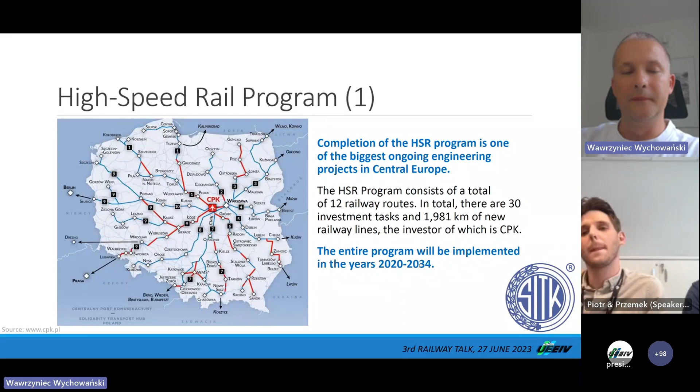In Poland, we are still thinking about the core of this network, and this core is called the letter Y because of the shape of this network. It is the railway line which connects the major cities: Łódź, Warsaw, which is the capital, Poznań, and Wrocław.

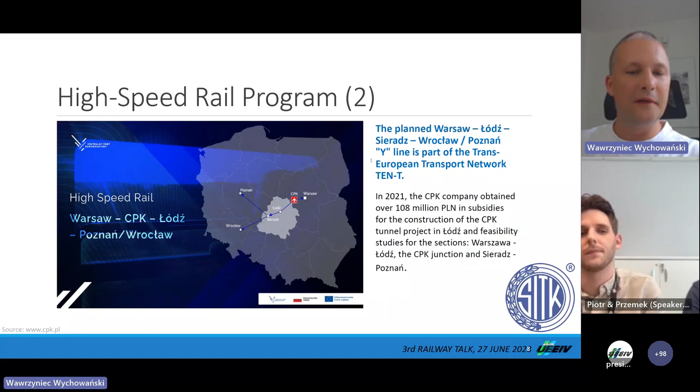What is important here is that we've been talking about this program for years - 15 years or more. But today we start a real process of design. You will see in the next slides that this program is currently ongoing, and you will realize that we are in the design phase, but very close to the execution works.

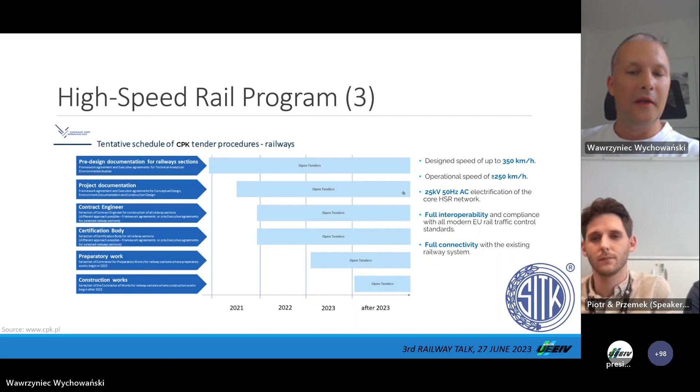Here you can find some dates - let's call it the typical approach. There is pre-design documentation for these sections, project documentation, contract engineer certification works to prepare the construction works, and the construction works at the end. You cannot see here all the topics related to this, like the test and commissioning programs and so on. But this is just to present that at the end of 2023, most of these lines will be at this level of construction works.

When we are thinking about high speed in Poland, we have to see that this is a very optimistic program. Design speed is up to 350, same story as in Italy. Operational speed is 250. Of course, when thinking about the new network, we have to consider the new type of power supply, which is double 25 kV alternating current.

This is a typical solution - full connectivity with the existing railway system. This is something unique because in many countries, the high-speed network is totally separated. In Poland, we would like to be connected to the existing traditional railway.

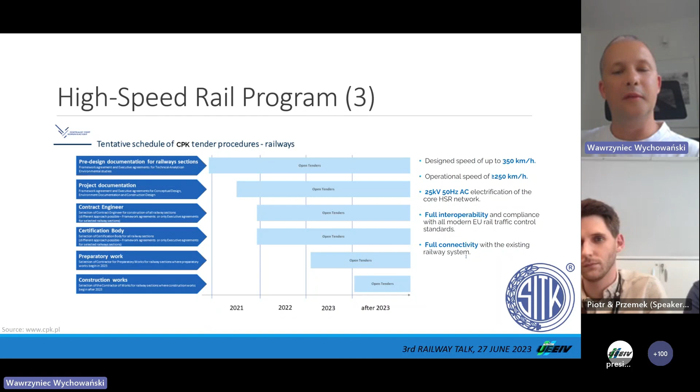This program is divided into phases - there is a study phase, a design phase, and others. What is important here is the new approach at the Polish market, which is the framework. We would like to define the short list of companies responsible for the specific phases of this program.

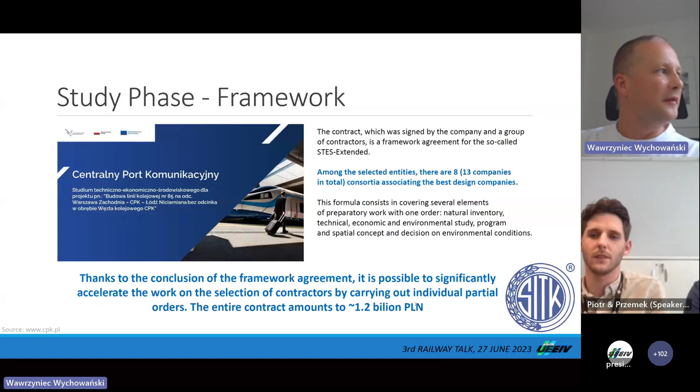Here you can see some kind of summary for the study phase - there are 13 companies. This is the amount of money behind this program: 1.2 billion zlotys. At the end of this presentation, I will try to do a short conversion between zlotys and euros, but I think when you divide it by 5, you can see the scale of the program.

Next phase is the design phase, and this is something we are already in. Again, there are another 11 companies from countries like Poland, of course, Spain, France, Germany, and Korea - a lot of entities with huge experience in high-speed railway across Europe and outside Europe. The budget behind this program is 7 billion zlotys - again, divide by 5 to see the amount in euros.

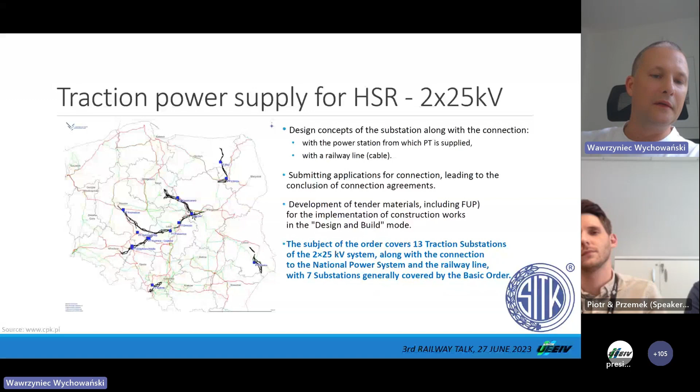Traction power supply - something new here again, we have double 25 kV. This is a similar story like in Italy. The existing system at the conventional lines is 3 kV DC. Within this project, we have to design 13 new traction power substations, which will be ready to supply the high-speed trains traveling across this new network in Poland.

If you are thinking about high-speed railway, you have to define the input - you have to define the standards. Instytut Kolejnictwa developed these standards, and there is version 2.0 in force. You can find a lot of technical details describing our approach to high-speed railway in Poland. Of course, these standards are still under revision, and they are discussed with French entities, Spanish entities - companies or entities with experience in high-speed railway.

In Poland, we do not have rolling stock ready to be used at high-speed railway. That's why there is a shortlist of 10 companies like Alstom, like Hitachi, the biggest ones, with minor representation of local Polish companies, to be ready and prepared for the moment when the network will be ready to be put into operation. Then we will have the new type of trains ready to be operated at the speed of 250 and even above.

This program in Poland is connected to Europe, let's say. We have to consider that we are somehow in the middle, and we have to be connected. There is a project of the Baltic states, which is Rail Baltica. Probably most of you heard about this project because it's a little bit more advanced than the things we are doing in Poland. And we are connected - we are connected to Rail Baltica.

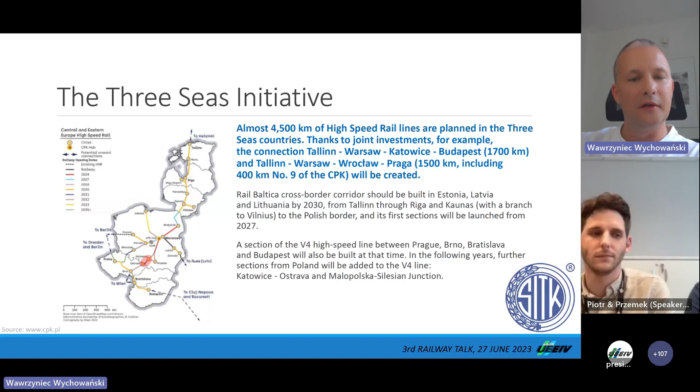And the 3 Seas Initiative - this is probably new for most of you, but here we are trying to connect to neighbor countries like Czech Republic, Slovakia, the Baltic states, and Ukraine. The program ongoing in Poland is connected to all of these neighbors. We would like a straight connection to Berlin, to travel fast to Vienna, and it's considered to put a regular track to Lviv and further to Kiev. All of these stories are connected and in line with the program we are facing in Poland.

So the first question we have to ask is: why? Why do we even bother investigating anomalies in the railways? This question can be crucial, and there can be numerous reasons why we should focus on detecting anomalies. But above all of them, nothing is more crucial than safety. It should be a top priority for everyone involved, whether a company, a passenger, or a member of the public - ensuring safety is of utmost importance in the railway industry.

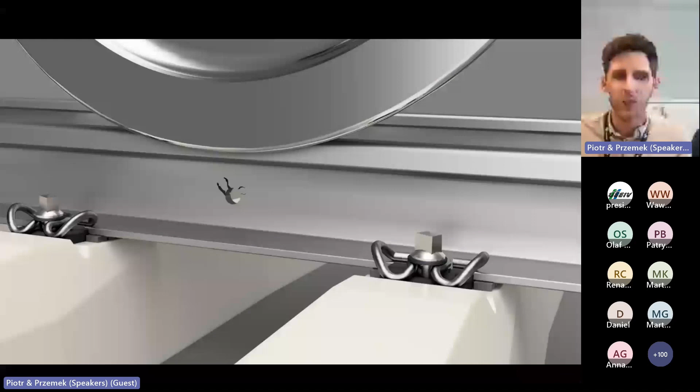When it comes to anomalies, what does this term actually encompass? Let's name three groups of railway infrastructure elements that are susceptible to anomalies, such as rails, ballast, and fasteners. If we focus on just rails, we can differentiate at least four types of anomalies: fracture, cracks, bend, and head checks. In some cases a part of the fastening can be missing, just like here - the part of a clip is missing. Or in this case we can witness a bolt hole cracking, a situation which also frequently happens.

There are already many anomaly detection methods, starting from visual inspection, ultrasonic testing, acoustic monitoring, infrared thermography, track geometry measurement, and ground penetrating radar. We focused on developing solutions based on vibration-based methods.

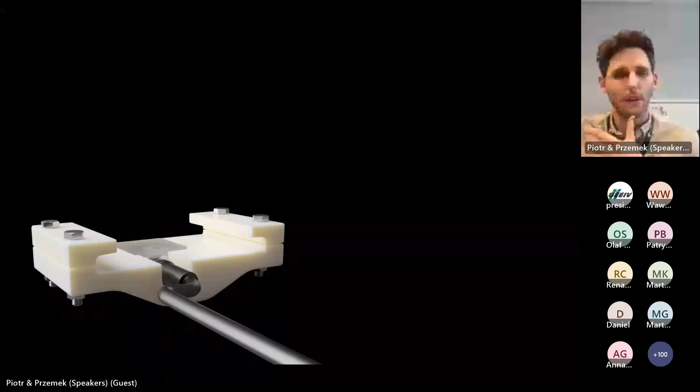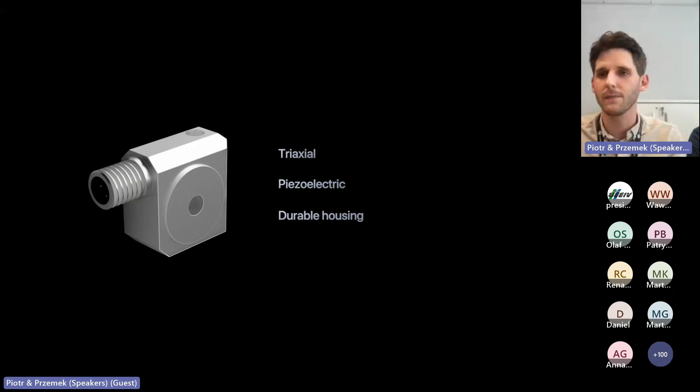Here is a little sneak peek of how it looks - here it is assembled, here it is disassembled. When it comes to how it's made, it consists of an electrical insulator, accelerometer, and polymer housing. The accelerometer we use in our solution is a special triaxial piezoelectric accelerometer with a military-grade durable housing. To quickly and rapidly analyze millions of samples we receive, we use a specialized DSP processor, which stands for Digital Signal Processor. It helps with noise filtering and provides efficient calculations with high-speed processing.

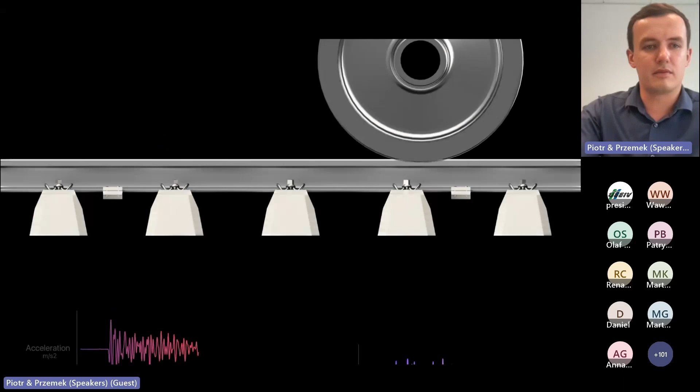But to tell you more about how this works, here is Piotr. In macro scale, the system consists of two accelerometers attached to the bottom of the rail. When the train is coming, both sensors feel the vibrations and it generates a voltage signal through the piezoelectric effect.

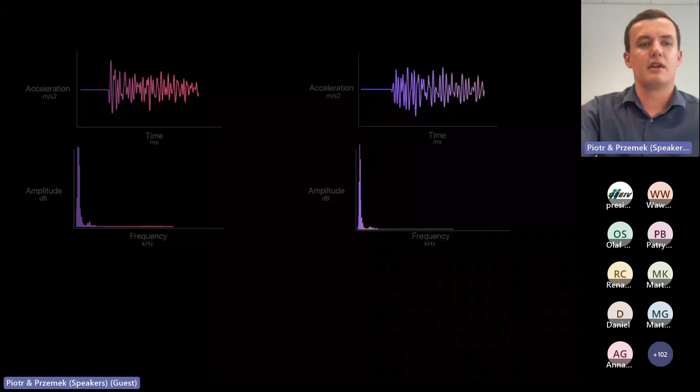At first, we have to filter the data. In our case, the best filter family was the recursive filters, like, for example, Kalman filter. Next, we have to perform Fourier analysis to get the dominant frequencies. The Fourier transform has the nice advantage that it's not sensitive to some random noises.

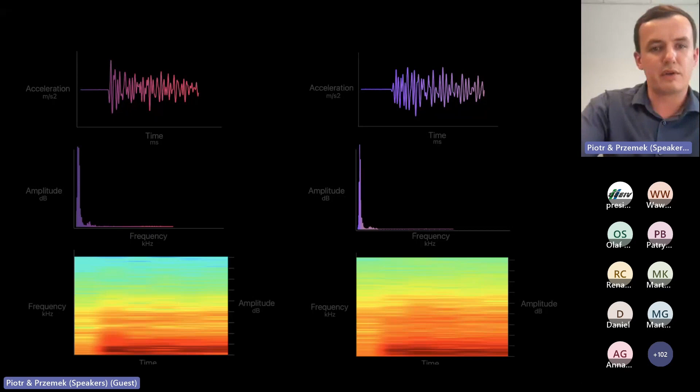However, the frequency may change in time, so we have to make spectrograms too. As you can see, even now, without anomalies, the signals differ from each other. But how can we find the anomalies by human eye? We can find some different frequencies, some peaks, something is changed.

But if we have millions or even billions of samples, the human is not able to analyze that. Moreover, if you have some pattern of signal that represents some physical phenomena, we are not really sure if this is what we think. We have to do a lot of measurements and it takes a lot of time.

But we hope that we found some solution. To know more about that, let's go back to Przemek.

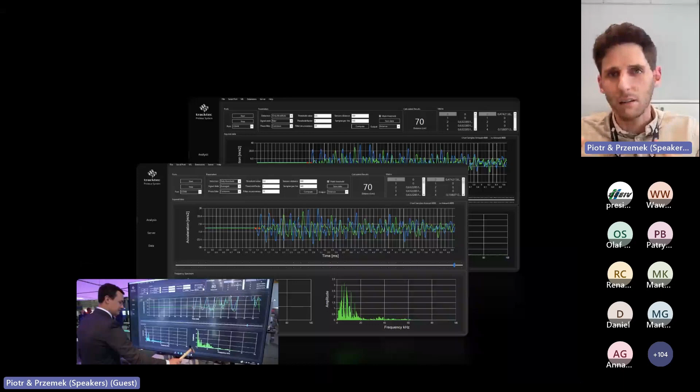And thanks to that, and thanks to a lot of calculations in hidden layers, we were receiving information. It is possible to receive information about the position of anomalies in the rail. Last year, we were able to show a live demo of the system during the Berlin InnoTrans Fair.

During the last few years, we were able to install electrical sensors on hydraulic drives on one of our high-speed turnouts. This one is in Psarski. Together with live weather information, we are analyzing voltages and currents of hydraulic drives and remotely spotting warning behavior of it.

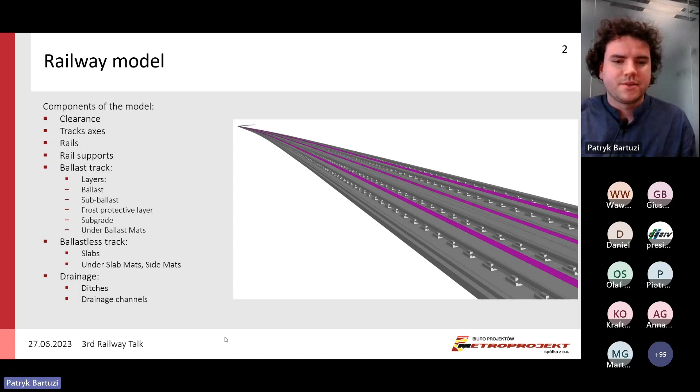Kuba, I would like to ask you, take the microphone a little bit higher, because of the quality of the voice. Okay, now it's super.

Thank you. Okay, all 2D documentation is made from 3D models. This keeps the documentation consistent and eliminates the risk of differences between all the documents.

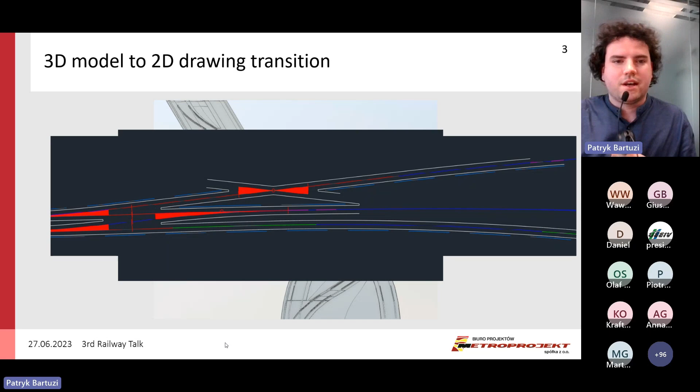You can see on the slide a 3D model of slab track, and from the model we can make 2D documentation of different types. For example, we can make the plan which includes slabs, and we can make a different 2D drawing with track axis, with turnouts, and the documentation is consistent, which is most important in situations like changes in the project or design. You don't have to change every drawing one by one. If you make the change in the 3D model, the changes are automatically transformed into the 2D drawings.

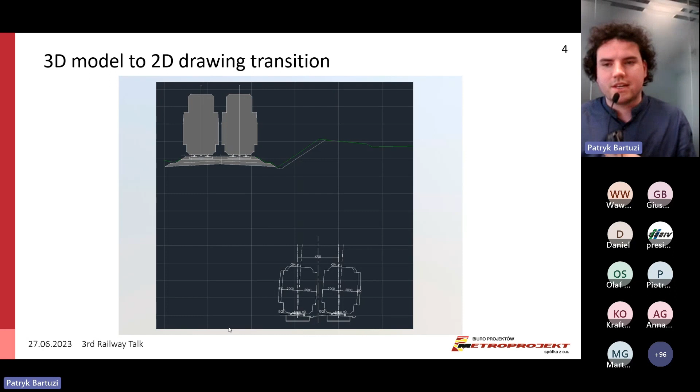Of course, there are other types of 2D drawings, like in this slide, cross sections. Cross sections can be made at almost every kilometer using different styles as shown in this example, and dimensions, which you can see in the lower part of the graphic, are generated automatically, which allows us designers to check if there are no mistakes.

Another very important thing in using BIM methodology and BIM models in design are calculations. The most important calculations in the railway branch are earthwork balance. As many of you probably know, the earthwork balance may generate many millions or even billions of dollars or euros of cost in the building process. So it is very important to make the earthwork balance as precise as possible.

Manually, there is a possibility to calculate this balance using the cross-section method, which is based on approximations that may generate inaccuracies or even mistakes. We can use 3D models to generate earthwork balance directly from the model, based on the difference between surfaces generated from the existing terrain and from the lower surfaces of various layers, including the lower layers of railway track and drainage.

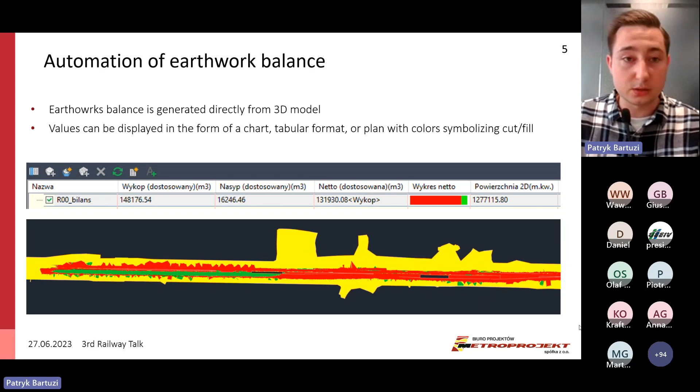Hello, I'm Jakub Schulz, and like my friend said earlier, I'll cover the part about construction. We're sorry about this inconvenience with our microphone, but our main device appeared to not work before the start. But as part of our work, we're engineers, so we had to find a solution.

Building information modeling, BIM, is well known in architecture and structural design, but when we talk about construction in railway, it's still kind of an innovation in Poland. But implementing BIM technology makes our job easier, especially when we talk about coordination between all branches. Work done in a railway model by my colleagues is the starting point for me.

But we can work in many different ways. Modeling can be done manually, and even then using 3D models from all branches is really time saving. But parameterization is the thing that optimizes the task on an unimaginable level. Track axes, in the form of 3D polylines, are the paths which we encapsulate with construction.

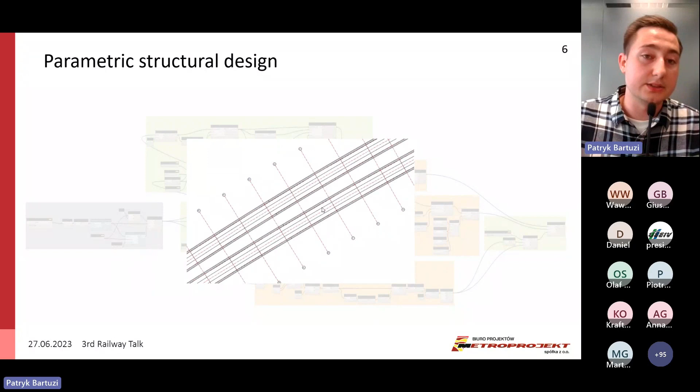It is very important too that Dynamo scripts are mostly done with visual programming. Knowledge of any programming language on an entry level isn't needed, and only more complicated scripts are made with custom nodes written in Python. So, like I said, we just encapsulate the track axis with construction, and that's how we build our model.

When we talk about the construction model, the level of detail and information of course depends on every project, on what we need to do. With TBM tunnels, modeling can be done almost fully automated, like I said. We encapsulate the railway model with construction around it. And with Dynamo scripts, it's possible to automatically divide the tunnel into tube segments and model every layer of construction.

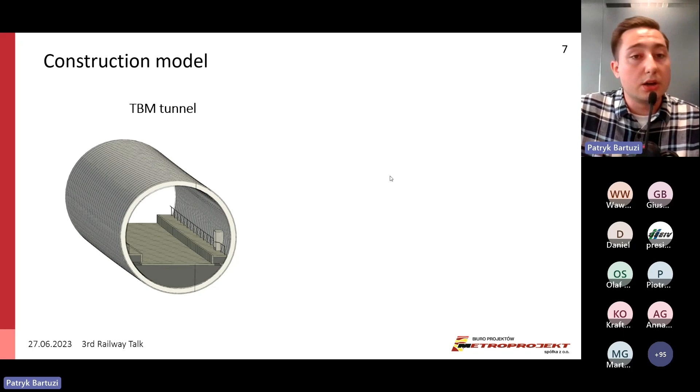But we don't design only TBM tunnels, we also design cut and cover tunnels. In both types of tunnels, we include every structural element like floors, beams, or walls. And everything practically depends on the required LOD and LOI levels.

LOD is level of detail and LOI is level of information. These models are then exported to create analytical models in structural analysis software, and with the use of the finite element method, we calculate the structure. But not only primary elements of the structure are modeled, we also create elements like lean concrete or jet grouting injections, which is really helpful at further stages of design, and I'll talk more about it soon.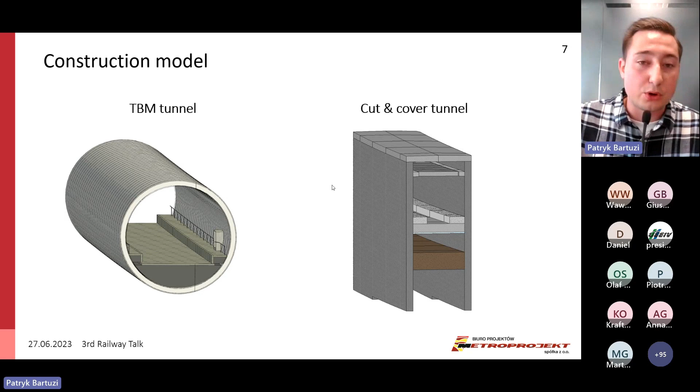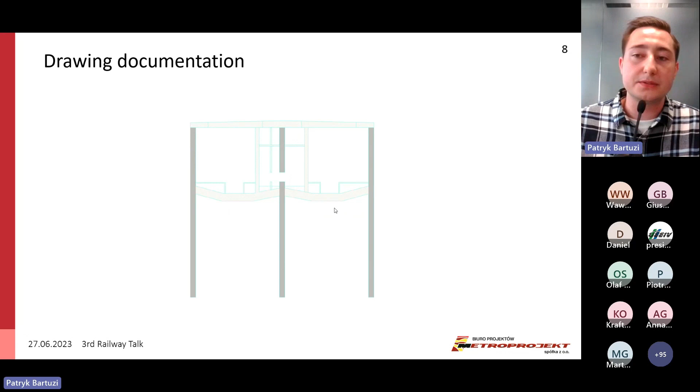When we talk about drawing documentation, like Kuba said before, just like in the railway branch, the 3D model is used to prepare all drawings. For over 70 years, our company has focused on a very high standard of documentation. But there is a very popular opinion that it is very, very hard or even impossible to reach the level of detail of 2D sketches in Revit. But to be honest, it isn't true when we've got really, really good standards and templates.

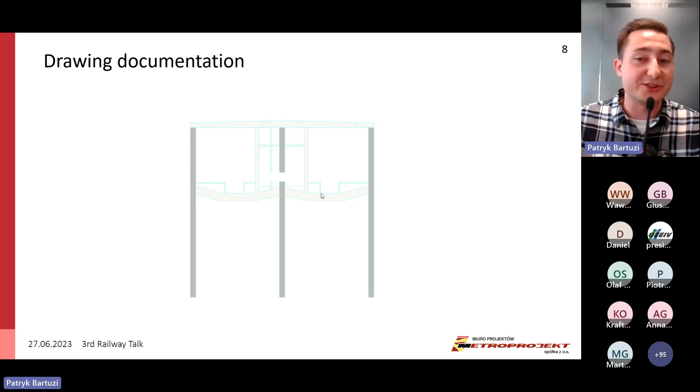Of course, we start with plans, like we can see here. These plans, sections, and every other type of view needed are generated in the model. And then with annotation Revit families and every other tool needed to recreate what was made in 2D before, we transform these views to create fully prepared project documentation that is ready to export and deliver straight to the investor.

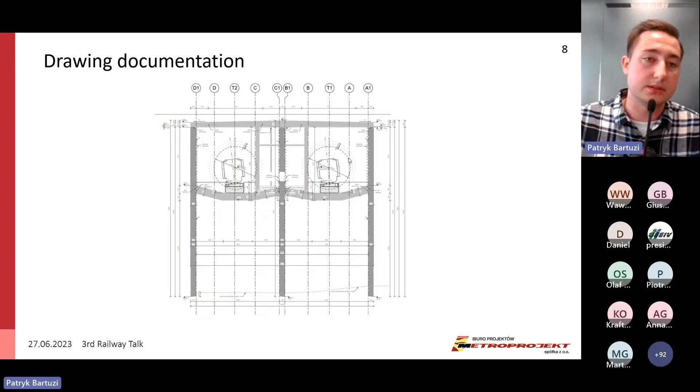But like I said before, BIM isn't only about the 3D model. It is probably the most important thing, but it's the methodology and workflow of digitalization at every stage of the project. Even in the model, parameters are as important as geometry. We can check every measurement and property of any element in real time.

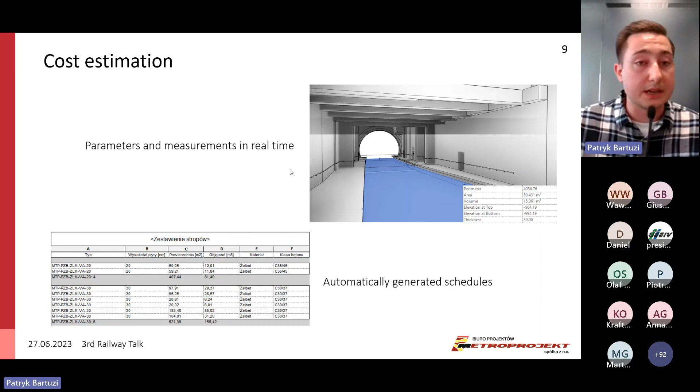At the final stage of the design process, we can use all these parameters for automatically generated schedules, then use them in cost estimation, reducing the amount of work needed. The model can also be linked with a time schedule to create video visualization of the realization process, and even used on site to inspect execution time.

And there are many other ways to use it, like model walkthrough in video form, or even with the use of virtual reality. Design process is just the beginning, and models are then used during operation and maintenance. Thank you very much.

Super, Kuba. I was waiting for this moment, for you to present the real usage of these tools. Because we save a lot of time and money when you drop in the automated process, for example, in the cost estimation of line infrastructure. Patryk, now it's your turn, and we'll focus on the signaling story, right?

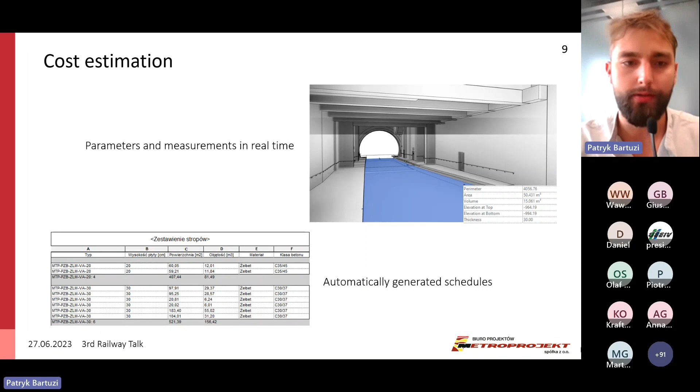Okay, hello everybody, I'm Patryk Bartuzi, assistant CCS designer, and I'm going to tell you some interesting things, I hope, about designing CCS systems in BIM technology.

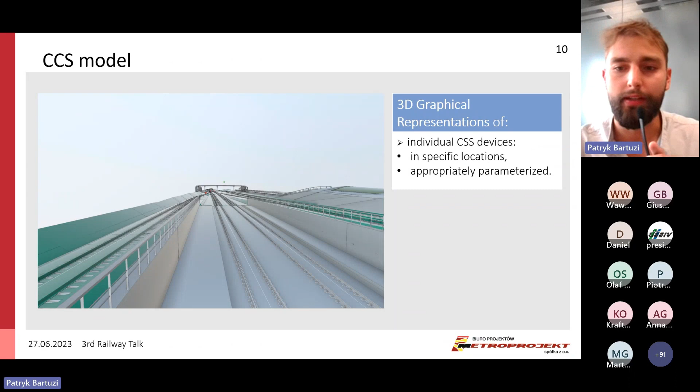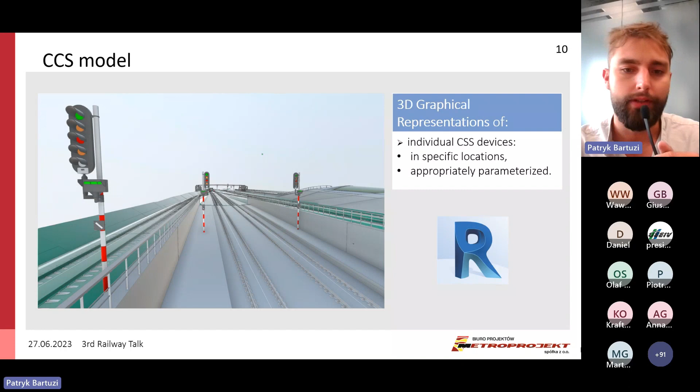In general, creating a 3D BIM model for the CCS industry is based on placing 3D graphical representations of individual CCS devices, which are appropriately parameterized and placed in specific locations. The 3D graphical representation of any CCS device is a family created in Revit software. My presentation is centered on the rail signal, which is the most elaborate and complex CCS device.

Polish rail signals can vary from each other in terms of the number of light chambers, light colors, position of the signal head relative to the mast, the presence and quantity of light stripes, quantity of individual indicators, and also the height of the signal head, which depends on the number of indicators and light stripes. So rail signals can exist in multiple configurations, and modeling each one individually could be very time consuming and labor intensive.

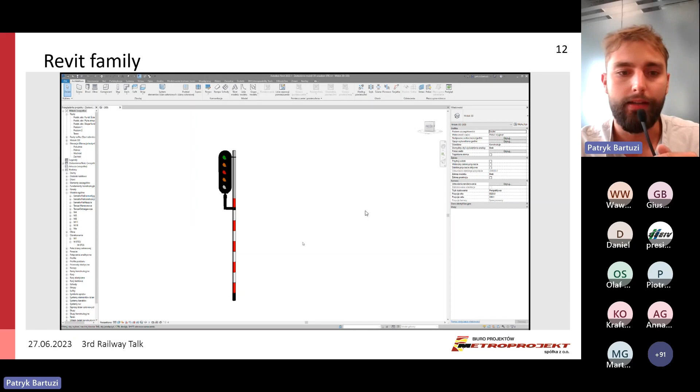So here is Revit. Revit software, in addition to creating just a solid with a specific shape, also allows us to assign parameters to that solid, and by setting values of those parameters, we can control the shape. As a result, we obtain one family representing a rail signal, which can be repeatedly placed throughout the project space. For each individual instance of that signal family, we can assign specific parameter values to get the required design scenario.

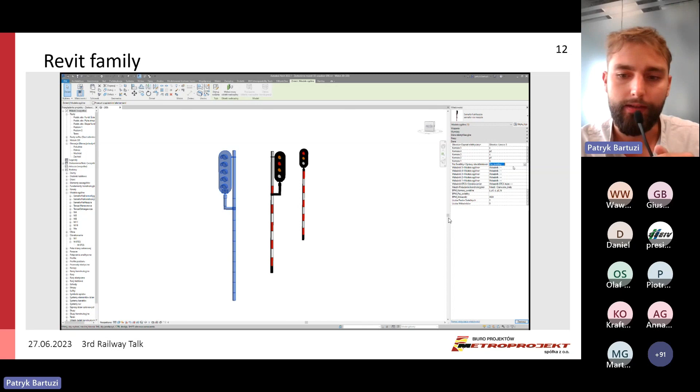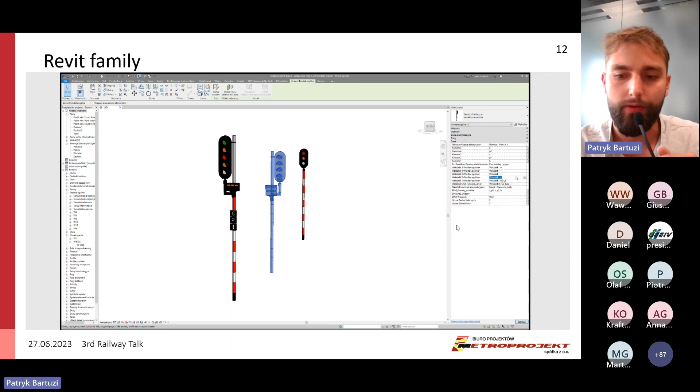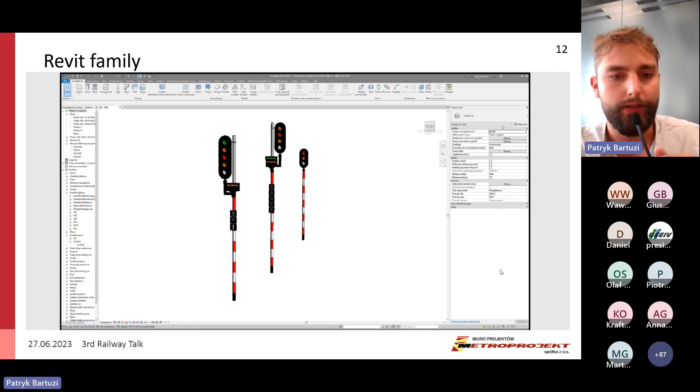By setting values of those parameters, we can control the number and colors of lights and the position of the signal, the presence and quantity of light stripes, and of course we've got indicators here - we can control the number and specific type of each indicator. Please note that the family adjusts the height of the light head depending on the number of indicators and light types.

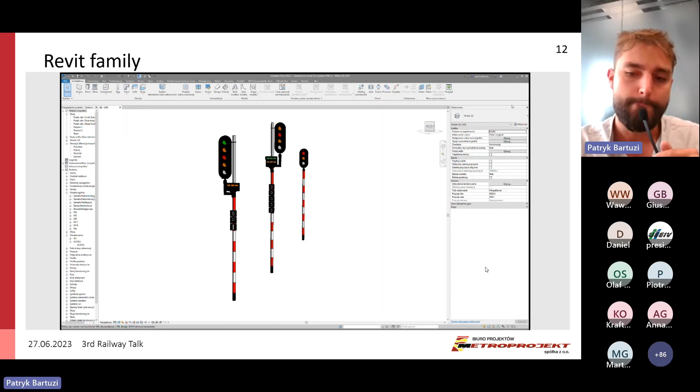So when we've got our families prepared like that, all we have to do is place them in a specific location according to the track axis and project space.

To determine that specific location for installing a signal, it's necessary to refer to the track axis that contains the mileage data. The track axis, as mentioned before, along with all coordinate data, is contained in a file created by the railway industry using Civil 3D software.

And here is one problem, because unfortunately Civil 3D and Revit software are not compatible enough to allow loading the track axis and performing related operations within the Revit environment. So we had to find a solution, and we solved that by creating a 2D graphical representation of rail signals that can be used within the Civil 3D software environment.

That graphical representation of a rail signal in the Civil 3D environment is a dynamic block. By placing those dynamic blocks along the track axis, we can get the mileage and coordinates, and use them in the Revit environment.

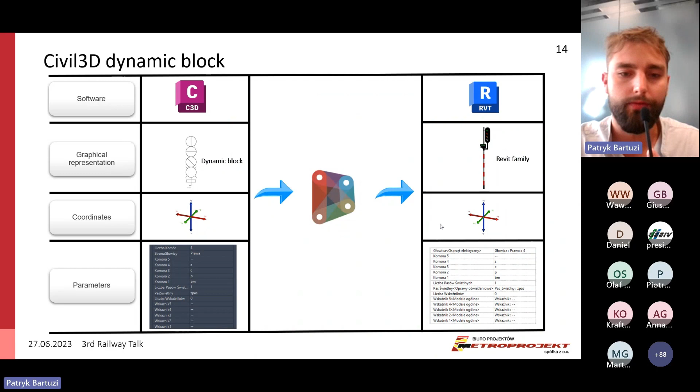But what is most important? A dynamic block, after being placed in the precise location, has parameters related to that location that can be transferred to the signal family in Revit. So all of this data, such as mileage value, 3D project space coordinates, and graphic representation parameters of the signal, by using the Dynamo script, can be transferred to the Revit environment, thereby generating a 3D model for the CCS industry.

In summary, the workflow of creating a 3D BIM model for the CCS industry is as follows. Based on the track axis created by the railway industry, using a Dynamo script, we can automatically put dynamic blocks of signals along the track axis and assign graphical parameter values to them.

The script requires filling an Excel spreadsheet with information such as the mileage of a specific railway line and parameter values for individual signals. Running the script results in placing the dynamic blocks in specified configurations at the specified locations on the track.

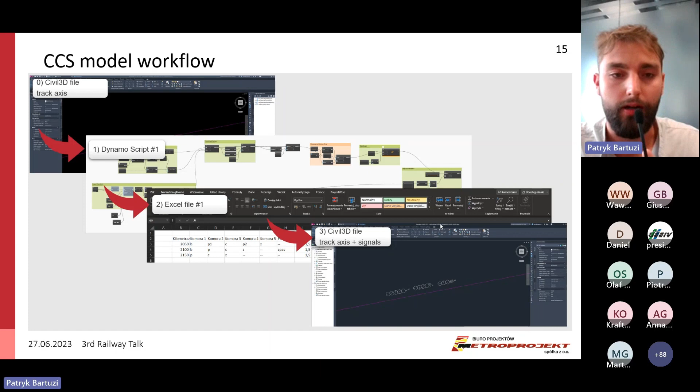Based on the prepared Civil 3D file, using another Dynamo script, we are able to export all the desired parameter values, such as graphical ones, and what is really important, coordinate parameters, to an Excel spreadsheet.

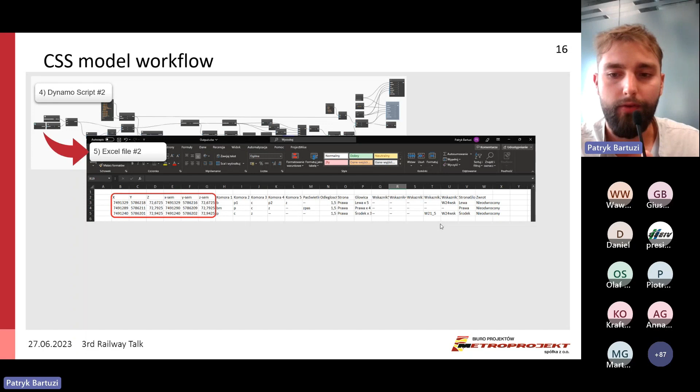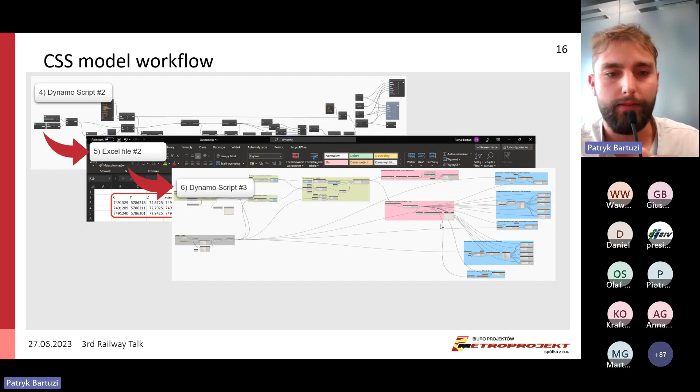From there, the Dynamo script imports the necessary data into the Revit environment, placing signal families in specific locations with specified parameter values, thereby creating a complete 3D BIM model for the CCS industry.

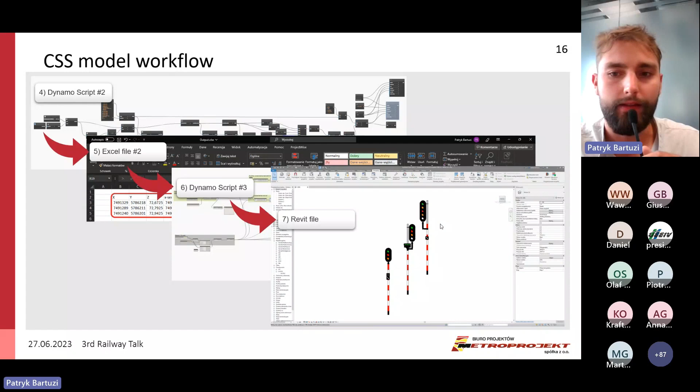We've got a lot of advantages of BIM in CCS system designing. With an appropriate library of dynamic blocks and Revit families, it is possible to include every CCS device in the BIM model in an automatic way.

The proposed workflow ensures one space for creating and updating the model, which would minimize potential errors in the project. It also guarantees full compatibility of 2D documentation with the 3D BIM model.

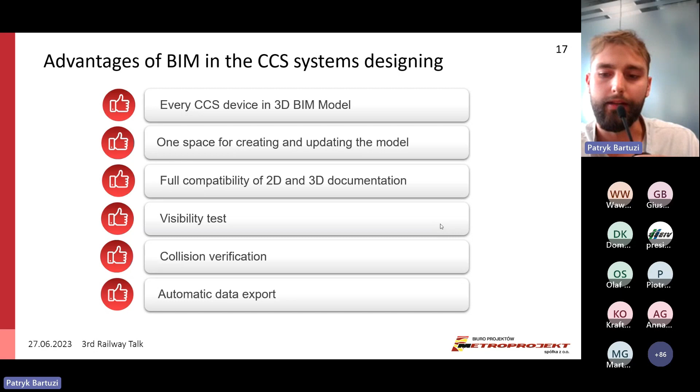We can also check the visibility of rail signals and other CCS devices. It gives us the possibility to verify clashes with other infrastructure elements and cable roads. There's also the ability to generate detailed data reports, also in an automatic way.

So at the end, as a summary of the whole process, our team has adopted a practical method that involves step-by-step contributions from different experts. So now we can see the track input to the 3D BIM model. Then the construction designer incorporates the structure, considering the existing tracks. And finally, the CCS industry places their equipment, completing the project.

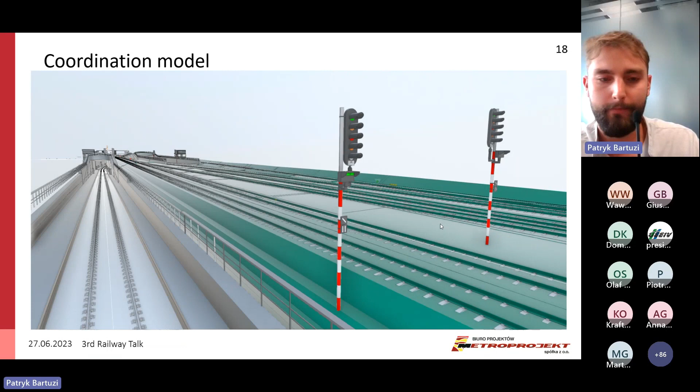Okay, because this is the moment when all of you coordinate each other, right? So all of you guys, construction, let's say the track side, let's say the signaling system, so all three of you are coordinated here, right?

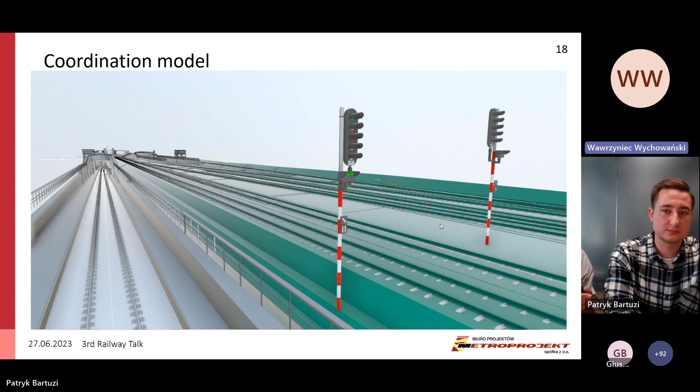Okay, so hello from Bulgaria, of course. Greetings to our colleagues from Bulgaria. And now, Kuba, I would like you to answer this question, okay?

So the question is, what is the distance between the center line of the railway and the edge of the platform in Poland? So it's 1.675 meters.

And the connected question: what clearance do you analyze and design, and do you have railway lines with other clearances? The main clearance which we analyze and model is GPL2. Of course, as part of the main clearance, we also make extensions in tunnels according to standards from, for example, PKP PLK or CPK, wherever we are expected to. So the answer is GPL2 is the main clearance that we use to analyze our models.